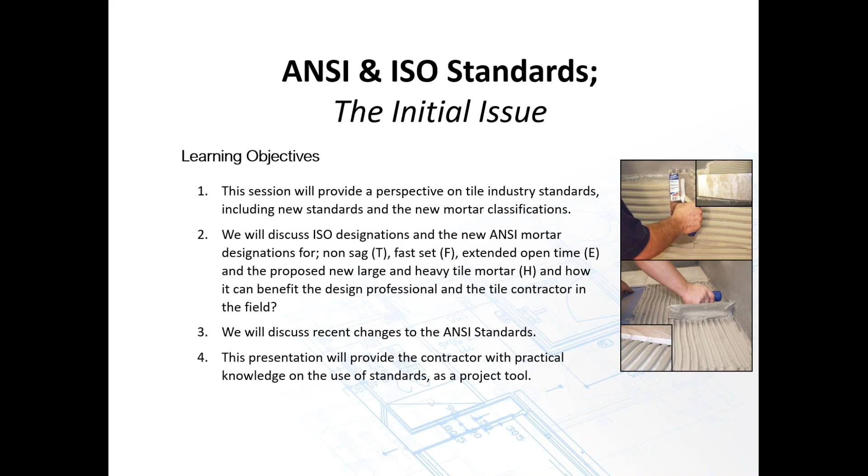First, let's talk about TCNA. The TCNA handbook, in the very front of the book, talks about using the TCNA handbook for specification writing. I know this is difficult to read—it's a lot of information on a single page, but hopefully the next page will help a bit more. Think of TCNA as kind of a guideline. The TCNA handbook is not a specification. It's really a reference that includes CAD details, et cetera, on installation methods.

What's highlighted in this first paragraph of the TCNA handbook, for use as a specification, is to use the American National Standards Institute, ANSI standards, for developing specifications. Specifications should conform to applicable building codes, ordinances, trade practices, standards, and climatic conditions.

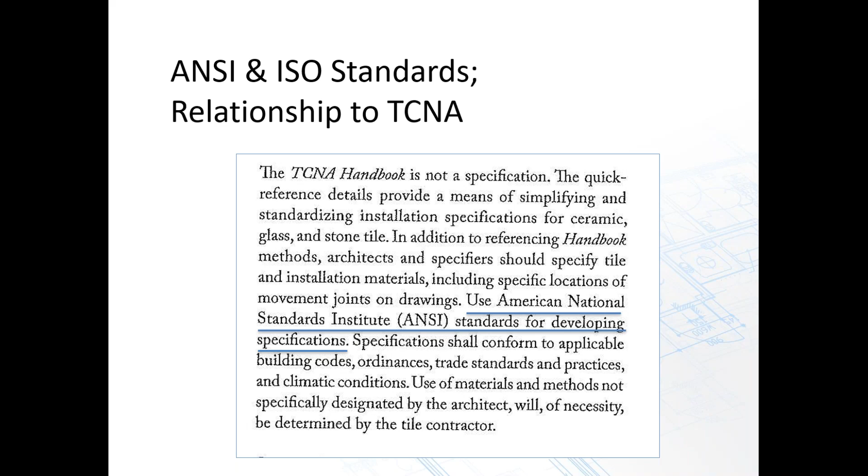So just wanted to get that out of the way. The TCNA handbook by itself is not alone—it really references ANSI. As we get into a method, this is a typical method in the TCNA handbook. I just wanted to point out, using their little pointer, that in here you'll notice the materials are all specified by ANSI standards, and where applicable, you'll also notice ISO standards.

Same thing is true of the grouts and the membranes. Uncoupling is still working on a standard, and for porcelain tile, there are different types of mortars that should be used. You'll also notice they've got installation guidelines for the tile, as well as glass tile, cementitious grouts, crack isolation membrane, uncoupling, and movement joints. So again, they're all kind of interconnected. Under notes, they talk about crack isolation membrane, ANSI 118.12, et cetera. So they are heavily connected together, and that's important.

So these are two different documents that work extremely well together in harmony to help a design professional and/or tile contractor put together the best specifications they can for a project.

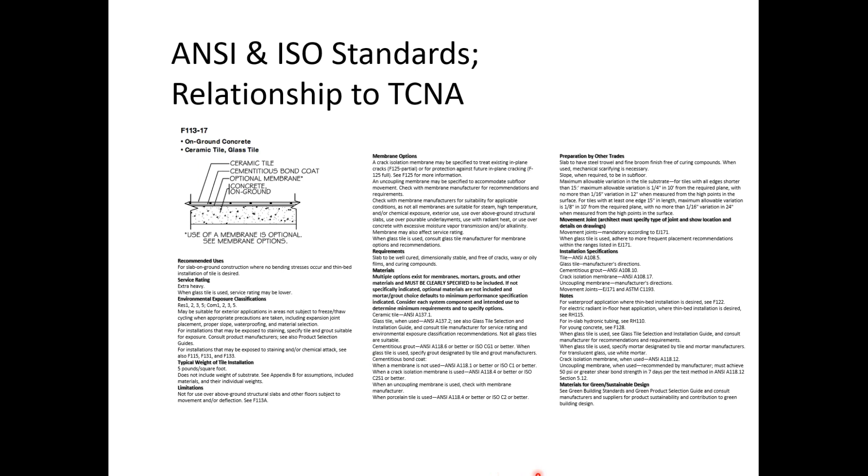Now, as I mentioned in the beginning, I am very actively involved in a lot of different committees, from TCNA to ANSI, you name it. These documents are put together by open consensus, or industry consensus. What does that mean? Well, that means we kind of throw a bunch of people in a room and we work it out—or fight it out, if you might—until we agree on something.

I can't think of a better example of this than the gauge porcelain tile standard—gauge porcelain tile, and gauge porcelain tile panels/slabs. The technical tile committee at ANSI was trying to decide on the name for gauge porcelain tile, or thin tile as we used to call it. In the room, many manufacturers liked the term gauge porcelain tile panels; others liked the term gauge porcelain tile slabs. So now you've got a gauge porcelain tile material standard, as well as gauge porcelain tile panels/slabs.

That is consensus. We came to an agreement on what it should be called. We worked very, very hard trying to get agreement throughout the committee. You're talking about 64 plus attendees or members trying to agree on documents and what they should say. It really takes a lot of work as a large group from different entities to come up with a good agreement. Some committees are better at that than others.

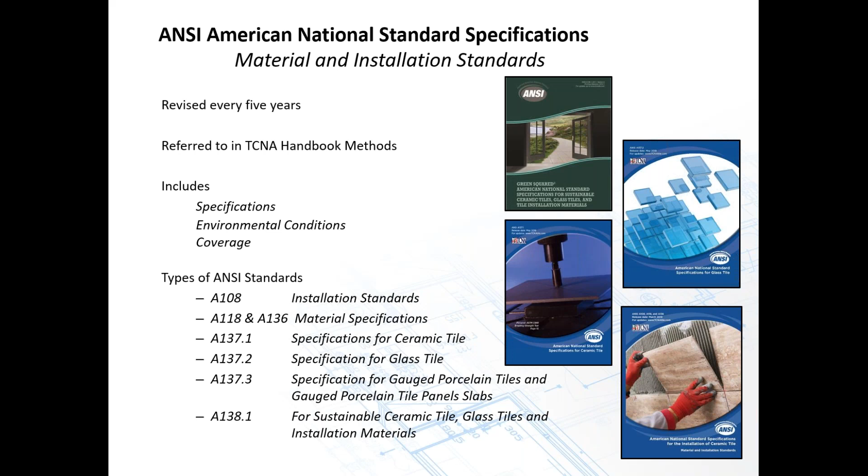Let's talk a little more about ANSI standards being heavily worked on at this time. One would be ready-to-use or pre-mixed grouts. A good example is our Flex Color CQ — you open the bucket, you use it, etc. It's kind of a new thing within the last 6 to 8 years, so we're working on a standard for that. I think that's progressed very well in the last couple of years.

The standard's actually being written. Round robin testing, I believe, is completed, so it's just a matter of analyzing all the results. Uncoupling membranes is one I mentioned earlier that's being worked on. There's a product standard for SLU, or self-leveling underlayments. Under review is the crack isolation standard.

One that's being considered is a standard for industrial epoxy grouts. These are used heavily in commercial kitchens and so on. They're a little different than the everyday epoxies you're used to 10 years ago — not your father's epoxies, if you might. These really hold up well to heavy chemical situations and food fats.

Tile deformation — a machine that'll actually measure the tile, and if it gets wet, if it expands at all, if it moves, if it is not stable.

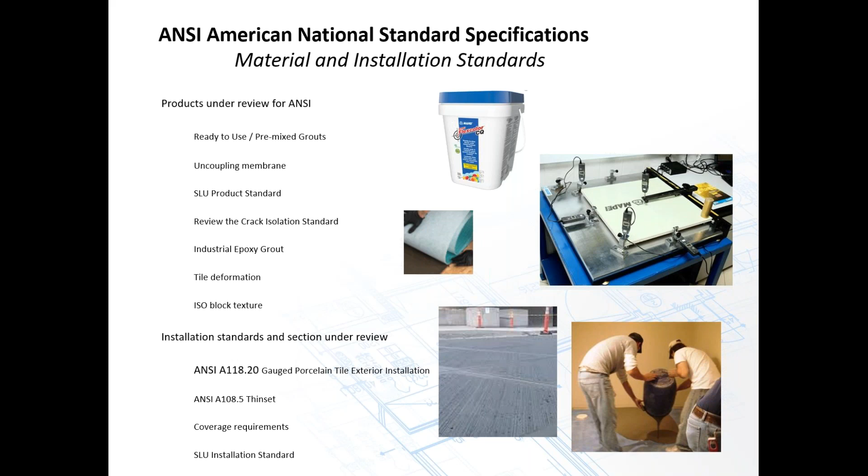Some recent changes to ANSI: the A108.19 gauge porcelain tile installation standard—again, that's for interiors only with a thin set mortar. ANSI A137.3, gauge porcelain tile as a product—in other words, the standard for manufacturing the product, the types of strengths it should have, where it could be used, etc.

The H designation was added to mortars for large and heavy tile mortars. I'll get into this in a little more detail. All the designations for ANSI mortars were added in 2012. In addition, in 2012 we came out with a new standard for mortars, the improved modified dry set cement mortar. We'll get into this in more detail as well, but it's a premium mortar, if you will.

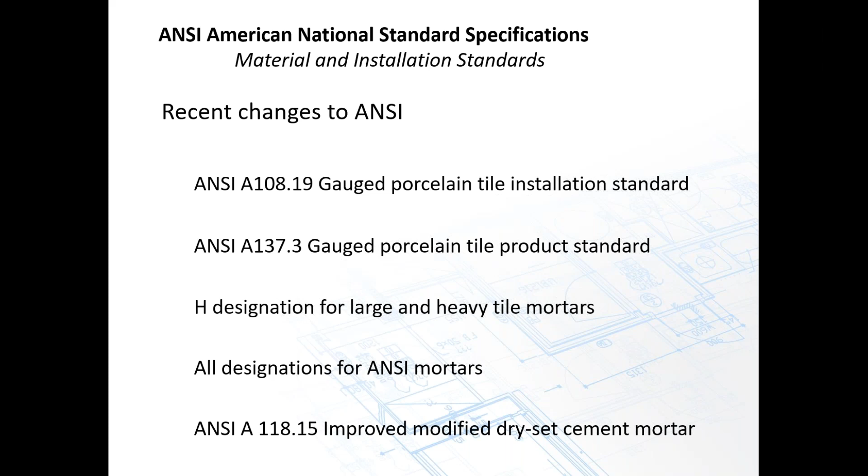All right, let's talk about gauge porcelain tile and gauge porcelain tile panels and slabs standards. ANSI A137.3 is the tile standard for gauge porcelain tile. ANSI A108.19 is the installation standard for interiors with a thin set mortar.

Why gauged? The technical tile committee felt like it made sense that this is a measured material, and the easiest way to refer to it would be gauge, much like we do with barbed wire or wire - 14 gauge wire, 10 gauge barbed wire, for example.

The emphasis is on the thickness, where thickness is crucial. Currently focused on thin, but could also be thick. I'm sure many of you have heard of a 3 cm or 30 millimeter porcelain tile today, or a 2 cm, 20 millimeter porcelain tile. These are 3/4 of an inch to 1 1/4 inches thick. The manufacturing process is very similar to what we do with gauge porcelain tile - it's just the powder, if you might, is made thicker.

These can be used anywhere from landscaping, just dropping them in your yard for a path or walkway, to maybe ballast roofs where they're having to have walk areas on top of a roof. Typically used in pedestal systems without any support - in other words, they put 4 pedestals underneath it and you're walking directly on the porcelain tile.

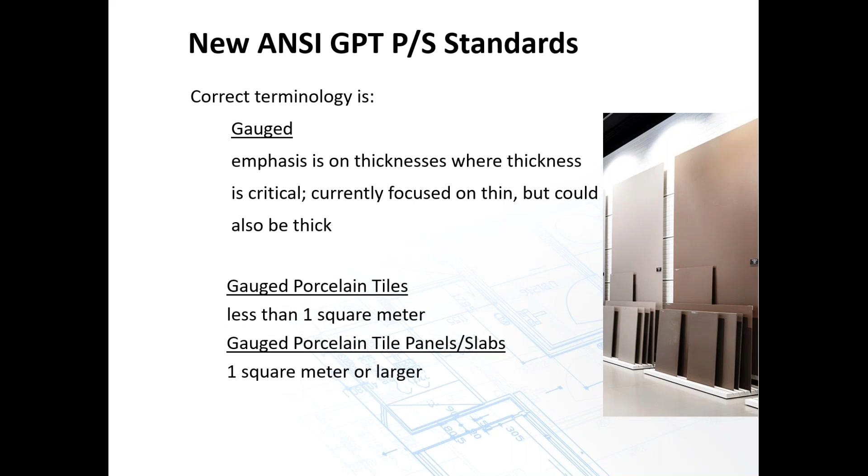A little bit more on the gauge porcelain tile panel and slabs standards. Table 4 has within it that it should have a nominal thickness of 5 millimeters to 6.5 millimeters for use on floors and walls, with or without reinforcing mesh. It's fairly common to see gauge porcelain tile with this mesh on the back of it. Some of the testing requires absorption and bond strength of this mesh after 7 days submerged, and as I said, they're also tested with and without the mesh for absorption.

Products with thicknesses from 3.5 millimeters to 4.9 millimeters are considered for walls. Certainly you could do thicker than that - 6.5 would be fine for a wall. They're not commonly marketed that way, but we certainly hear enough about and get enough requests for the thicker ones on walls too. Today we're getting requests for 12 millimeter, which is typically used for fabricating, but it's out there as well.

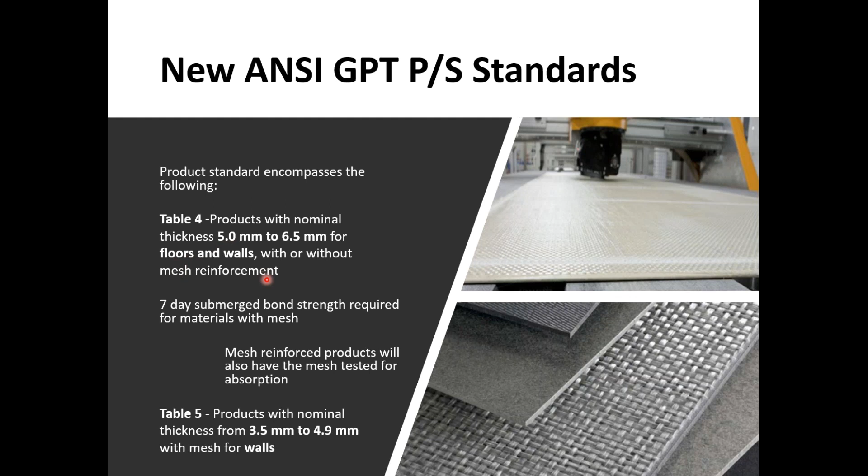The biggest thing I think we're really trying to stress here with this size is that these sizes are great for walls. You don't see them being recommended for floors and walls both. So really we want to stick to floors at 5 millimeter to 6.5. I hope that makes sense.

Really what happens with the gauge porcelain tile standard - I'm going to step away from gauge porcelain tile and just talk about traditional 3/8 of an inch or 10 millimeter porcelain. So if I took a concrete slab, about a 4-inch concrete slab, and on top of that thin set or use a polymer modified mortar to adhere 12 by 12 porcelain tile on top of it. Then I start these wheels that you see rotate four times with 900 cycles at 100 pounds per wheel, and it gets all the way up to 300 pounds per wheel, with a soft rubber wheel.

We look for damage. Anytime it's damaged, we stop the test.

It goes to the next phase, which is a harder rubber wheel. Again, 4 rotations of 900 cycles, with the weight on the wheels increasing from 100 to 300 pounds per wheel. If I was to go through the final rotations of this, it'll go all the way through 14 cycles, and the last section is with steel wheels. So we're really abusing the system, constantly rotating, and so on. You can imagine it takes a lot of abuse.

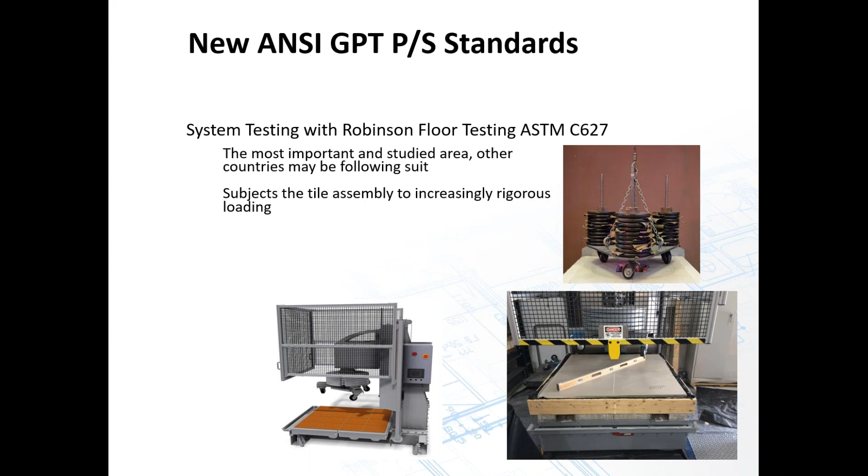So we really test assemblies. In the case of gauge porcelain tile, it has to come out with a light commercial testing, with gauge porcelain tile used instead of the regular porcelain tile on top.

So the TCNA handbook, you'll see a lot more on service ratings, but to give you an idea: cycles 1 through 3 gives you a residential rating, again with up to 300 pounds per wheel. 4 through 6 you get light commercial, then moderate commercial, heavy commercial, and extra heavy. You can kind of get an idea - commercial kitchens and so on for extra heavy, food plants, dairies, breweries.

Really, they're taking fork truck traffic as well as pallet jacks, heavy carts, a lot of concentration on a small wheel. Just because an assembly may pass extra heavy does not mean the manufacturer wants it used in heavy. I'll come back and talk about that in a little more detail.

But heavy is for malls, stores, commercial kitchens, etc. Light institutional work, restaurants as an example, or hospitals for moderate. And then light commercial would be offices and bathrooms in an office complex. And last, foyers as an example of residential.

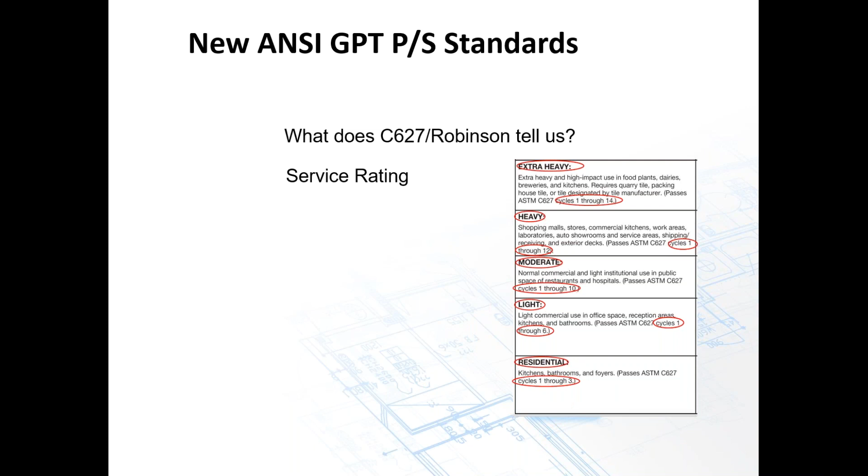So typically with a gauge porcelain tile, this is the type of damage we see. It doesn't just crack as we typically see with 10 millimeter or 3/8 inch porcelain tile - it actually spalls, or fractures right there, and the grout joint will typically pop out as well. Light commercial is the minimum requirement for a gauge porcelain tile to say it meets 137.3.

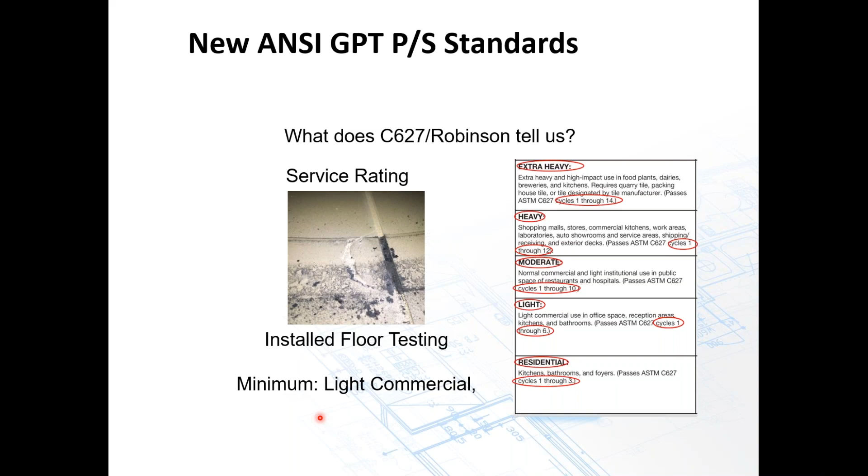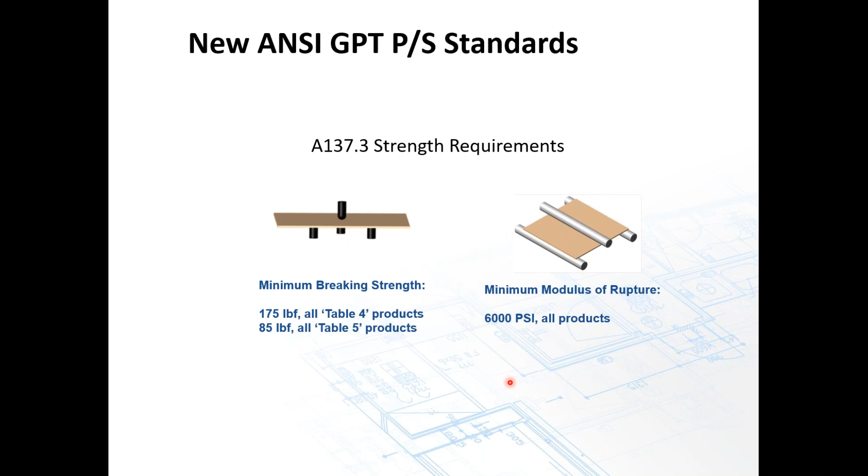Some other tests that are done: minimum breaking strength - how many pounds of pressure does it take per foot to actually break the tile? You can see it's suspended on 3 legs, and pressure is applied to the center. Same thing here with modulus of rupture. All right, that's just a quick overview on gauge porcelain tile.

Let me talk quickly about the installation standard - this is the installation standard for interiors with thin set mortar. There are 20 sections to the new installation standard, and I'll show you some that you've never seen before in ANSI standards. Job site and material handling requirements - we didn't used to have that when it came to 8x8 or 12x12 tile. But today with tiles 5'3" by 10'6", you need a large enough area to work and to transport it through, and to protect it.

We have things like how do you embed the tile in order to get coverage, workmanship, what happens with damage to the tile work, contractor qualifications - all important.

As I said, the ANSI test methods are reaffirmed or revised every 5 years. In 2012, there were some real changes.

They revised the 118.1 and 118.4 standards, and then brought out the new 118.15 standard. These new mortar standards and revisions brought out a new test method and new mortar standards.

118.15 is a premium latex modified mortar. I'll get into why we say that in a little more detail. This new mortar designation is new to ANSI and very, very important. It can be very beneficial to you in the field, so let me talk about that.

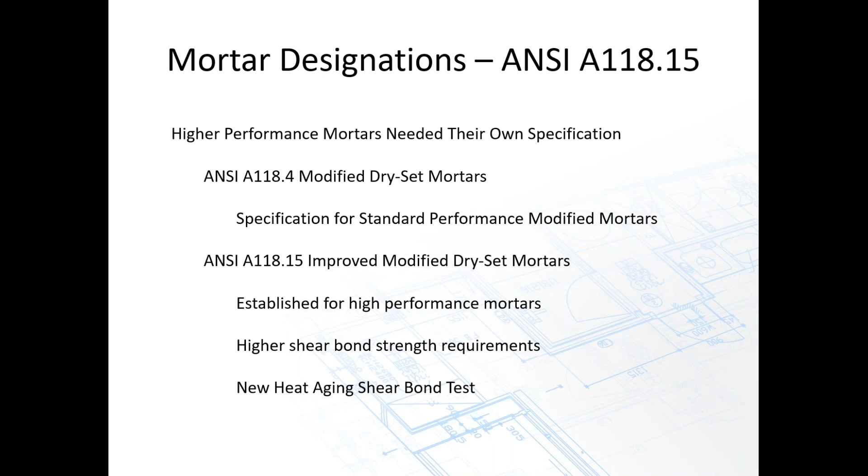So the heat age shear bond test takes 2x2 porcelain tiles bonded together, offset 1/8 of an inch. The specimen is cured 14 days at basically room temperature, between 70 and 77 degrees Fahrenheit, followed by 14 days at 158 degrees Fahrenheit.

The interesting thing about this type of mortar, because of the temperature fluctuation, you aren't going to just pass this by adding more cement to it. You have to actually make sure that you're really controlling the polymers and the additives to make sure that it can perform well through these thermal changes. So with a high cement ratio alone, that's not enough to pass it - it really requires a high polymer content to pass this test.

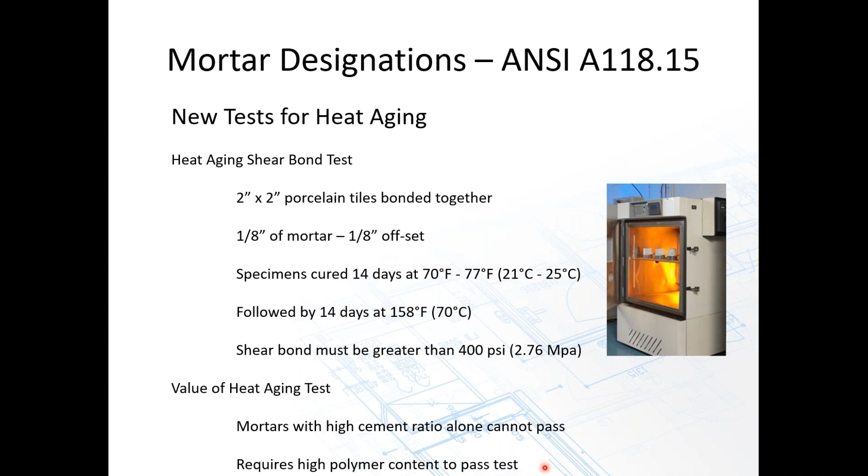Where might you use a 118.15 mortar? Anywhere where freeze-thaw might be a consideration, where flexibility is desired - maybe a lobby on the 50th floor of an office building in front of the elevators - where improved bond strength is necessary. So you've got something you believe is difficult to bond to, could be a porcelain tile.

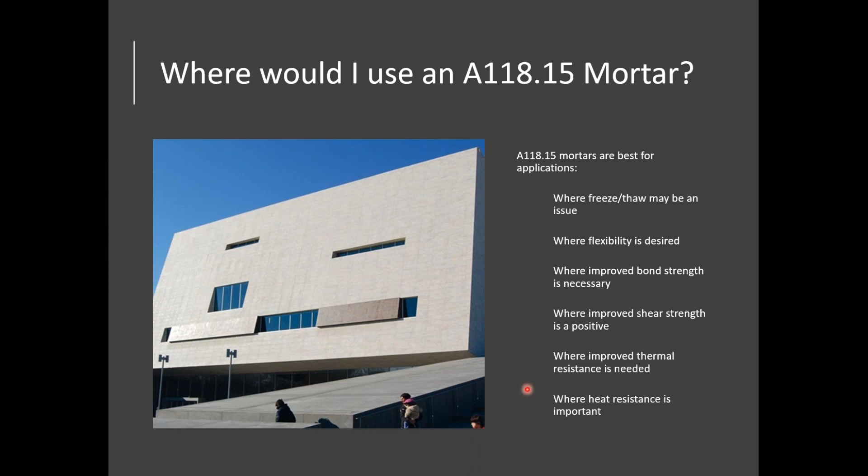In the case of, oh gosh, I'm trying to think of a great example - well, for that matter, it could be a membrane or something like that that's tough to bond to. Where improved shear strength is important, where improved thermal resistance is needed, where heat resistance is important.

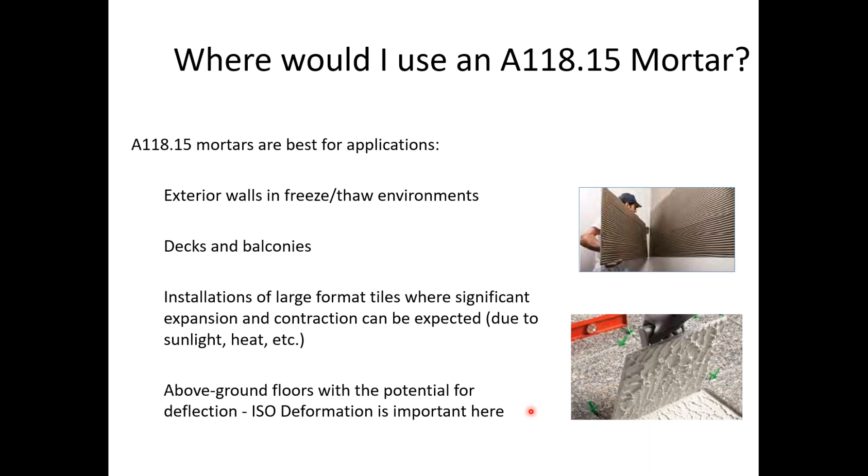Great example: exterior walls where there's a freeze-thaw environment, decks and balconies, the installation of large format tiles where significant expansion and contraction can be expected, maybe a lot of thermal change, above grade or above ground floors with potential for deflection. ISO designation for deformation could also be very, very important here - I'll get into that in a little more detail.

So these are some of the test methods for everything from 118.1 to 118.4 to 118.15 mortars. And you'll notice that when you look at some of the strengths here - and I won't go through all of them by any means - but to give you an example, shear bond test tile to tile.

Here you're looking at 200 PSI for a non-modified dry set mortar, 300 PSI - so 50% higher - when it comes to 118.4, and 450 PSI when it comes to 118.15. That's an exceptional jump - again, 50% higher.

When it comes to heat aging, it's not done at 118.1, it's not done at 118.4, but I was correct: 450 PSI after 14 days at room temperature, then 14 days at 158 degrees. That's impressive, if you ask me.

You'll see a lot of differences as you go through it, from 150 to 200 to 400 PSI, doubling in strength after 28 days. Also 28-day heat aging here with a porcelain tile has to be 400 PSI. 28-day freeze-thaw cycling, 118.4, 100 PSI, same requirement for the 118.15 mortar. So you can see a real benefit in the 118.4, 118.15 mortar, I believe—much higher strengths, good flexibility, allows for thermal expansion and contraction much better.

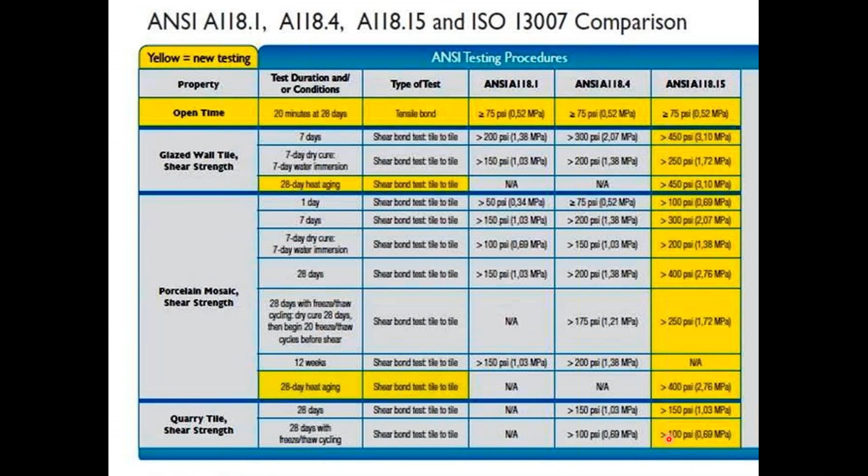All right, so when they added the 118.15 designation for improved modified dry set mortar, they also added mortar designations. So if you had a 118.4, I'm going to keep it real simple. Again, these designations could be added to any of the mortars, but when you have extended open time, 118.4, it might say 118.4E, extended open time.

What would be the benefit in you knowing that? Maybe you're working with large porcelain tile and you want to make sure you have plenty of open time, because you're going to be spreading 50 square feet on the back of a tile as well as 50 square feet of mortar on the back of the substrate. So you really have to have a lot of open time—an extended open time mortar would be wise to have.

118.4F would be a fast setting mortar. 118.4T, non-sag mortar, and the newest one from last year, 118.4H, large and heavy tile mortar, medium bed mortar. So that's new.

When it comes to 118.11, you have to meet 118.4 and all of it. For it to become 118.11, it also has to pass the exterior grade plywood test. So 118.11 has very little content to the testing because most of it's in 118.4. It's an extension, if you might, of 118.4, but with the plywood test—so it is still part of it.

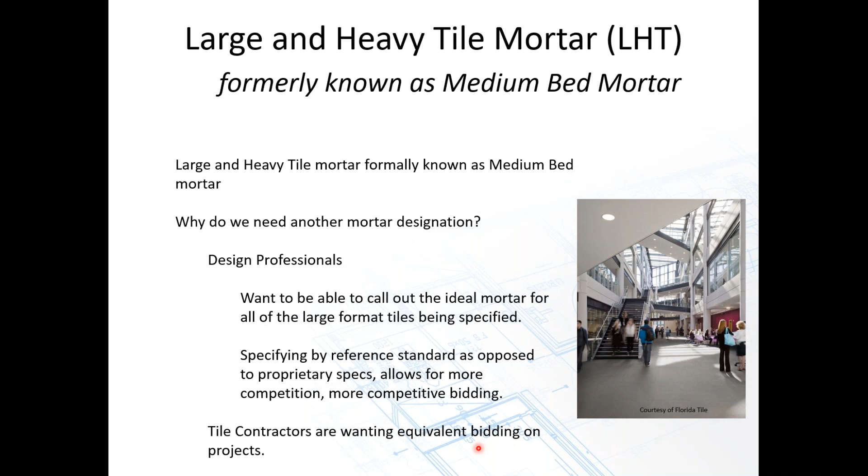A little bit of benefit of the LHT type mortar: it's defined by its performance characteristics. They're looking for non-sag or non-slump characteristics. If I put a heavy stone or tile into the setting material, I do not need it sinking in and oozing up through the grout joint. I need it to sit there and for me to beat it in or work it in, moving it back and forth and get it bedded properly to even out to the tiles next to it.

We're looking for less shrinkage at thicker depths. So this material, after it's been notched, tile installed, it's been flattened down or beat in, it can go as thin as 3/32 or as thick as a 1/2 inch. Standard mortars, ones that are not large and heavy tile mortars, typically are 3/32 to 1/4 inch, to give you a comparative. So you can go twice as deep with this.

This provides better coverage for large tiles with some warpage, right? Today we're dealing with plank tiles, up to 6 feet long, and in the center you might have some warpage—or fairly common to see 2 foot by 4 foot tile today. A little bit of warpage in a 4 foot length is quite a bit, it can be sticking up. So if we don't get the proper amount of mortar underneath it, that tile is going to have a void right there at the highest point. We want to make sure it's properly covered with mortar underneath it.

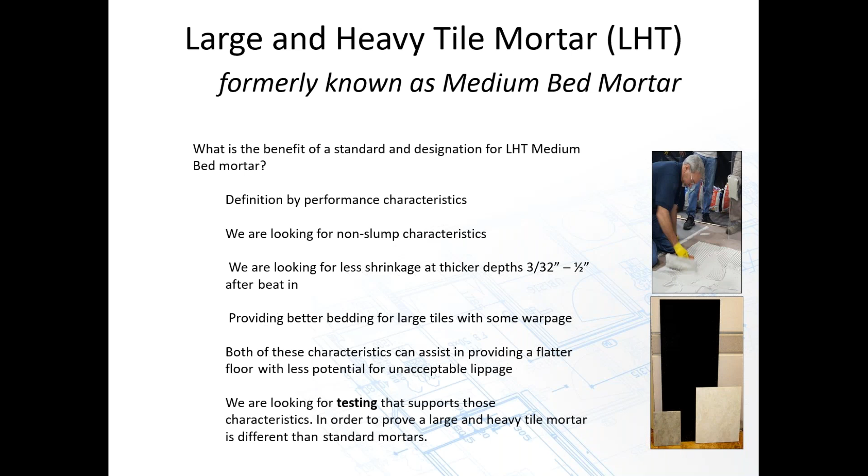So when it comes to the test standard for this material, it actually takes a tile or stone that weighs a certain amount—I believe it's greater than 5 pounds per square foot. It is set even and flat, it has to have virtually no lippage, and then after 28 days it's measured again to make sure that the lippage doesn't exceed the lippage requirements within the ANSI standard.

What was wrong with medium bed? That's what we called it forever. Where'd LHT, or large and heavy tile mortar, come from? Well, what started happening is contractors started getting asked to do, instead of properly preparing the substrate, general contractors would tell the tile contractor just go out there and do a medium bed method. Just build up the mortar, make it work. Not a good idea. There's a lot of potential for shrinkage and other issues with this.

They were actually starting to see from architects standards that said medium bed method. So for a traditional mud bed, we're going to have 1.25 inch minimum up to 2 inches recessed concrete slab, then tile setting material, mortar bed. We're going to be roughly 1.5 inches with the tile and setting material to meet that recessed slab. We were finding recessed slabs out there that were 1/2 inch, 3/4 inch. Basically they weren't done correctly, and we're being asked to do that with just a thick bedding of mortar. That's not its intention.

The medium bed mortar method was used commonly to prep for bad substrates. And there really was a lot of abuse of the term medium bed, so the industry just felt it was best to get it out of our vocabulary.

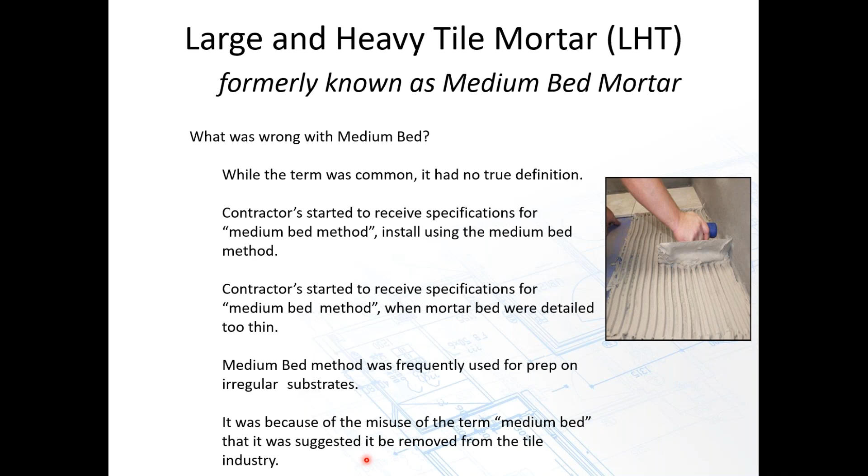According to the TCNA handbook in 2020, it still says LHT, or formerly medium bed mortar, is a thin set bonding mortar for ceramic and stone tile formulated by the manufacturer to minimize slump and facilitate a thicker bond coat as compared to typical dry set mortars, basically.

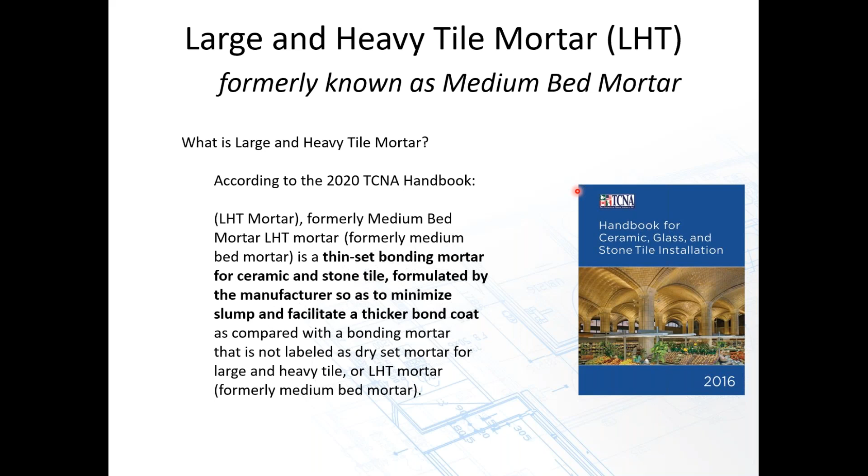Again, in the TCNA handbook in 2020, it says LHT, formerly medium bed mortar, is declared as such by its manufacturer based on its characteristics. There are no ANSI or ISO standards specific to this type of mortar. That is no longer correct.

Today we have the LHT mortar, which has the H designation at the end of the 118.1, 118.4, possibly 118.11 or 118.15 mortar. And that is to recognize it as being a large and heavy tile mortar, or formerly medium bed mortar.

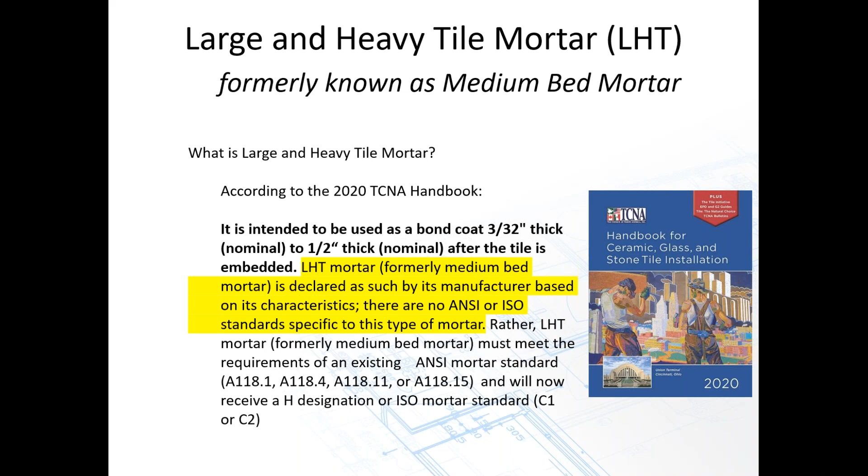It goes on to talk about the benefit of the LHT mortar being able to support a heavier tile, being able to deal with large format tiles in order to get enough bonding material in there to get mortar coverage in case of warpage or anything like that. And the same thing here, talking about warpage or regularity of the tile.

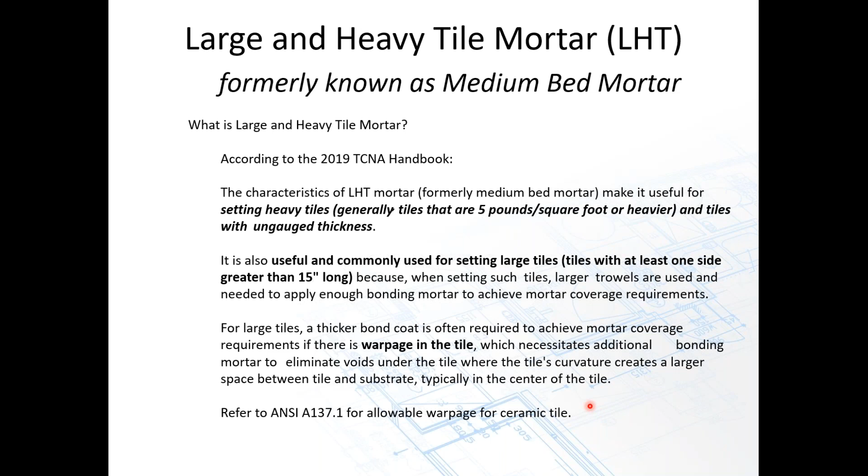And for 118.1, 137.1, if you want to get into the specifics about warpage, there are different grades within the case of porcelain tile, from calibrated to rectified and so on, rectified being the tighter of the two standards. Look at the 137.1 standard.

To the specifier, the TCNA handbook says the LHT mortar is not intended for truing or leveling the substrates or to correct the work of others. Substrate variation exceeds allowances. LHT mortar cannot be used to remedy such because the application would exceed the limitations of the mortar. LHT is intended to be used to install tile per 108.5 and the installation standard for ceramic tile by a thin bed method.

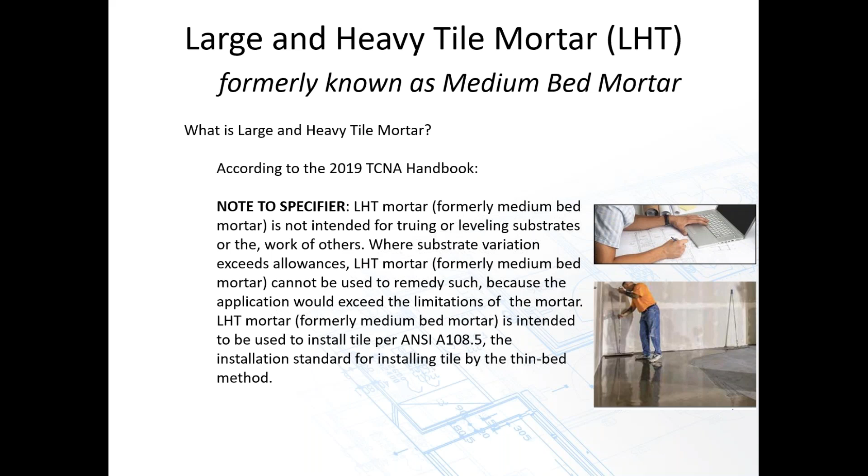Really what we're trying to get at there is if the substrate needs repair, repair it, and you should be paid for it. The installer should be properly prepared to prepare the substrate just as the rest of the other flooring industries are. The wood flooring industry, the resilient flooring industry, they don't even think twice about prepping a floor. They just go in there and do it before they do their project.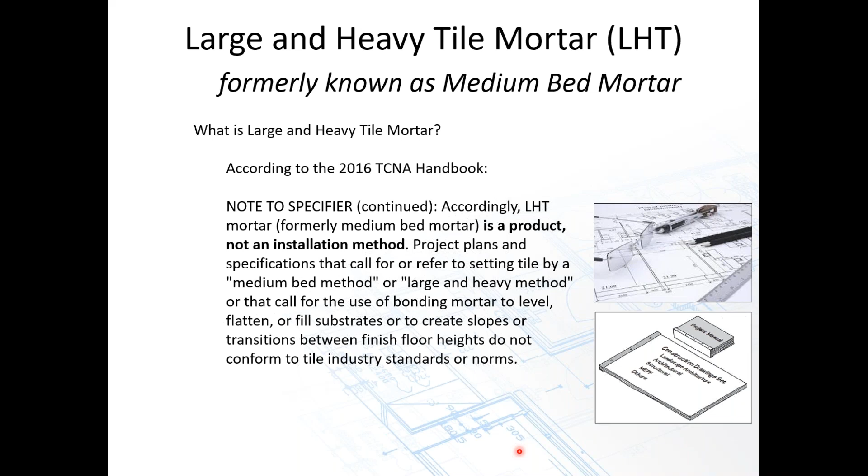To the specifier, again, this continues: accordingly, LHT is a product, not an installation method. Project plans or specifications that call for setting by a medium bed mortar method or large and heavy method that call for the use of a bonding mortar to level, flatten, or fill substrates, or create slopes or transitions between finished floors, do not conform to the industry standards.

So again, where might you use a large and heavy tile mortar? LHT or medium bed mortars have been around for many, many years and are very popular. They support thick and heavy units. A great example could be this large thick tile, or in many cases, a slate. If you got an ungauged slate, which used to be very popular years ago, it wouldn't be uncommon to pick up an 18 by 18 inch ungauged slate, and at one end it's 3/8 of an inch in thickness, and the other end 3/4 of an inch in thickness.

The large and heavy tile mortar would help accommodate for those irregularities or take care of that thickness difference. So it accommodates for thickness variations in the box screed method.

The box screed method is really probably the best way to explain that when you've got different thicknesses of tile. That's another nightmare for installers today - different tiles from different manufacturers with different thicknesses being designed together in a pattern on a floor. That's a real nightmare. If you have one that's 3/8 of an inch and one that's closer to 1/2 inch, that's very difficult. The best way to handle it would be through a box screed method.

For that matter, you put a mortar board on a mortar stand, cut a hole in the middle, and around the outside of that stand you cut 2x2 lumber. Let's say the thickest tile is a 1/2 inch in thickness. I lay the face of that tile down and want 1/8 of an inch of mortar on top, so I cut my 2x2 lumber at 5/8 of an inch in thickness. Every tile I lay in the face of that mortar board, I screed off the mortar and it always comes out 5/8 of an inch thick, whether I pick up a 1/2 inch thick tile or a 3/8 inch thick one. Then I set it to the floor, to the notches on the floor. So that's the box screed method, and another great example of using LHT mortar.

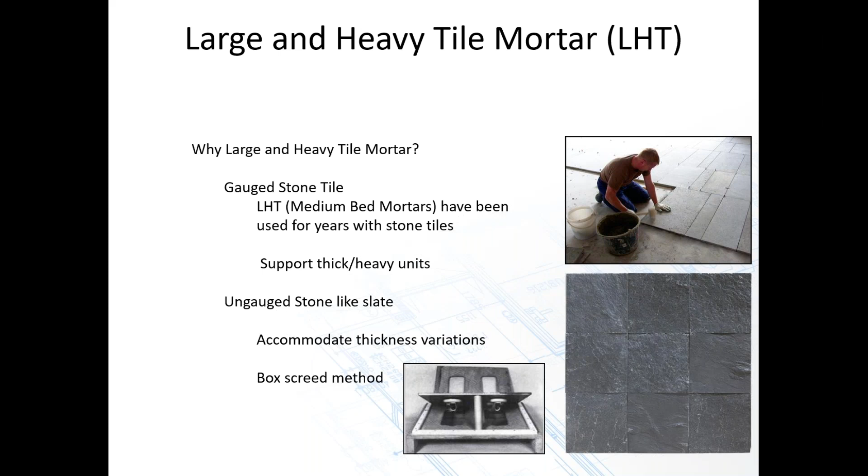Why large and heavy tile mortar? For warped tiles, to reduce potential lippage. Large format tiles where one edge is greater than 15 inches. Heavy tiles weighing 5 pounds or greater. The ability to adjust imperfections in tile or stone because of a thicker bedding. And specialty uses like saltillo tile or talavera tile, which we saw for years with very irregular backings, to make sure they get good coverage.

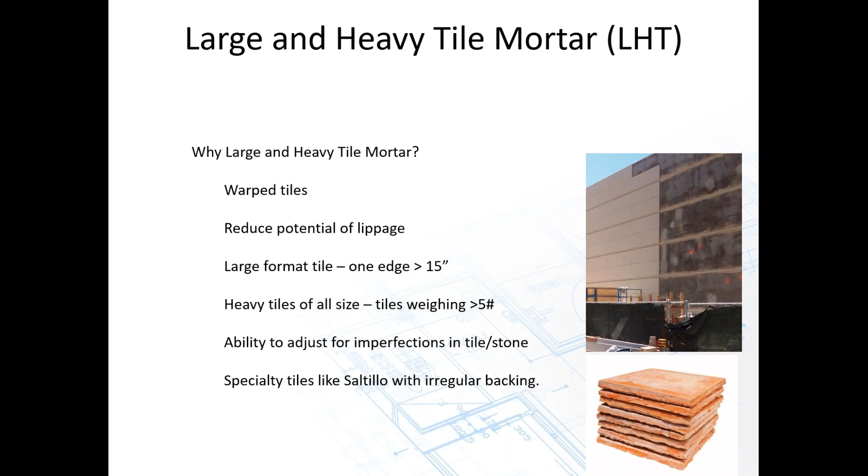Another characteristic about LHT mortars and the T rating is typically Thixotropic. What does Thixotropic mean? These mortars, while applied thick, hold the notch fantastically. When you go to move the tile or agitate it back and forth, you create shear and that material starts to flow a little, increasing your coverage. What does Thixotropic really mean if you don't understand what I just said? Well, you pick up a ketchup bottle, turn it upside down, nothing comes out. But if you shake it or hit the bottom, you create shear and ketchup flows out.

So the same thing is true here. We notch this out, it holds the ridges very well at a thicker depth. Lay a tile into it, push it back and forth to create shear, and that material increases its coverage just by the Thixotropic characteristics of the mortar. Hope that makes sense.

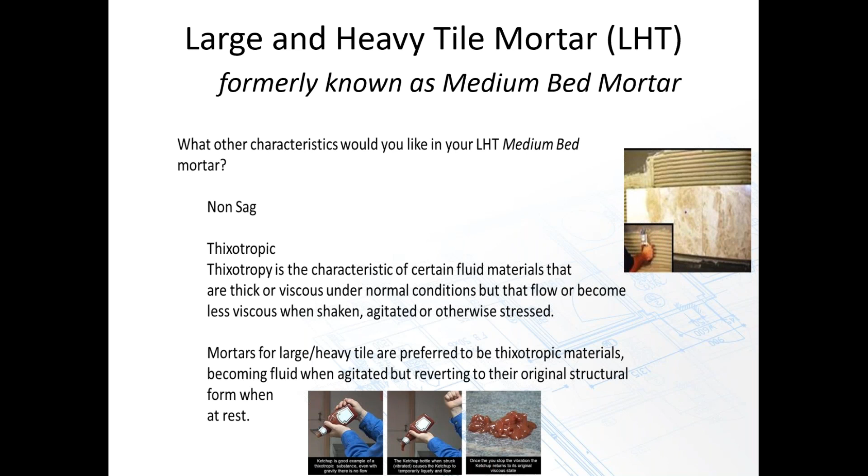Some problems with not using the proper LHT type mortar - again, it really should be used with tiles with one edge greater than 15 inches. All substrate preparation with those types of tiles should be within 1/8 of an inch and 10 feet, done previous to installing the tile, no more than 1/16 of an inch and 2 feet from the required plane. Truing with just thin-set can lead to shrinkage issues and loss of bond.

Needless to say, I told this gentleman he needed to get some tools out of his truck. We went down to the 20th floor to his truck, and I said, look, this is an issue with your application, and you need to get back up there and tell the owners about the issues and why this shrinkage occurred. I'll give you all the materials you need to work this out. This came out to be very amiable, and trust me, I did not want to upset Matt, a former linebacker for the Atlanta Falcons.

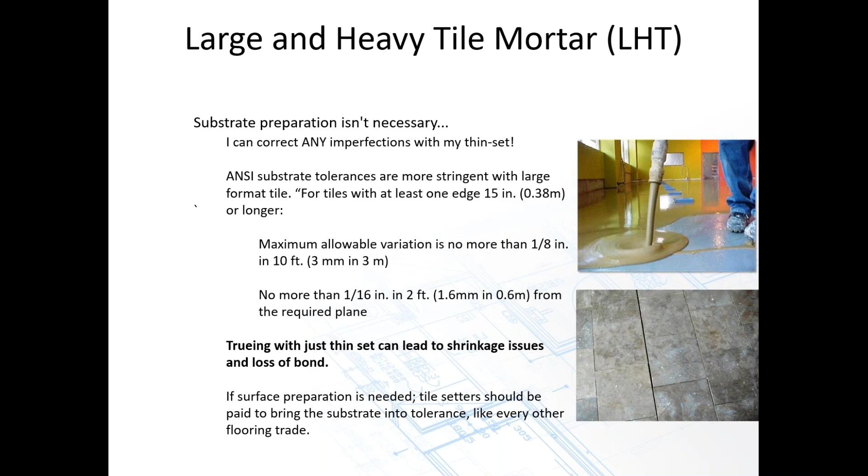Still a friend today. Let's talk about ANSI and ISO, because they're both related.

ISO is the international standard throughout the world and commonly used globally - ISO 13007 for ceramic tile as well as installation materials. It's an independent, non-government international standards organization with membership of 162 national standard bodies, like ANSI. It has delegates from 50 different countries, meets a couple times a year, and again is done through voluntary consensus basis. Why does it matter? Because ISO created the recognized way of identifying mortars and the mortar designation that we talk about today in ANSI.

Give you an example of how they do it, very simple. They've got 3 different types of mortars by chemical nature. One is cement or cementitious. D is dispersion, like a mastic. R is resin reaction, epoxies and urethanes. And then it's either rated with a 1 or a 2. 1 normal, 2 improved. C2 is an improved cementitious mortar. Very simple.

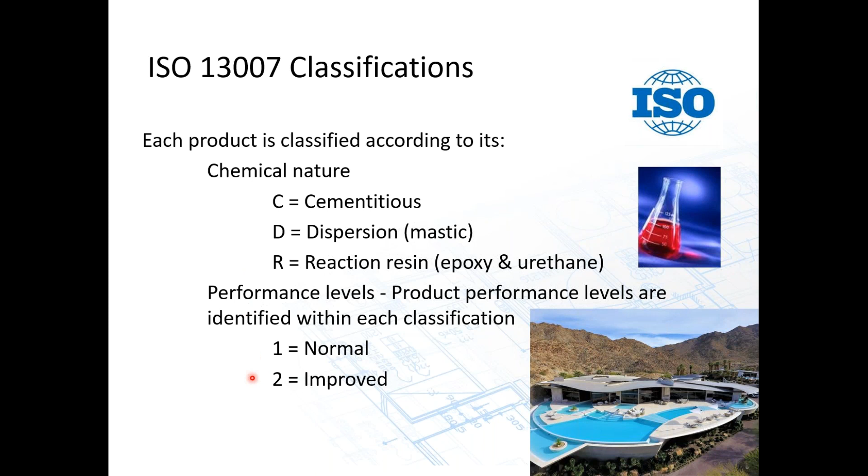This gives you a better example of looking at it in the mortars. And in addition to that, they have the designations we talked about in ANSI, except there's some new ones here. I want to point out that there is one for deformation. We do not have that in ANSI at this time. So flexibility: S1 being it's deformable, S2 being highly deformable or highly flexible. P1 is for plywood adhesion, P2 improved plywood adhesion. Very, very important. So ANSI has these in mortars, but they do not have these 4.

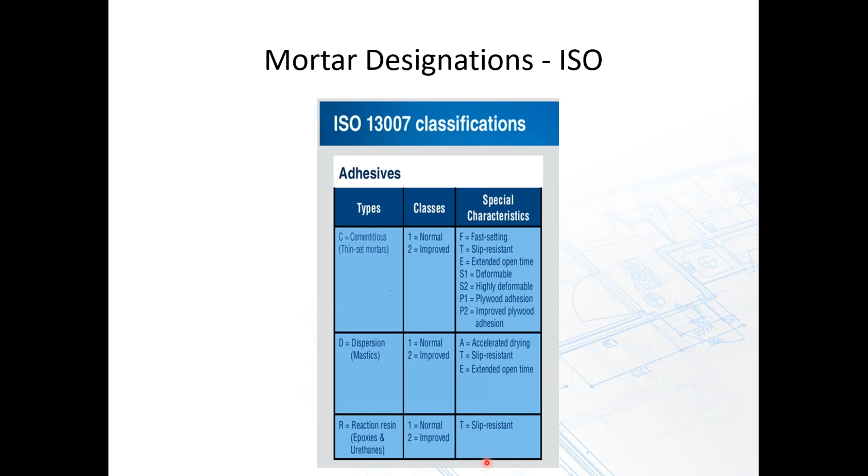In dispersion mastics, we've got D1, D2 for normal versus improved, accelerated drying, slip resistance, and extended open time are characteristics they like in that mortar. For reaction resin, again, R1, R2, and slip resistance. R2T would be a common one for non-sag improved reaction resin urethane, like our Planacrete W.

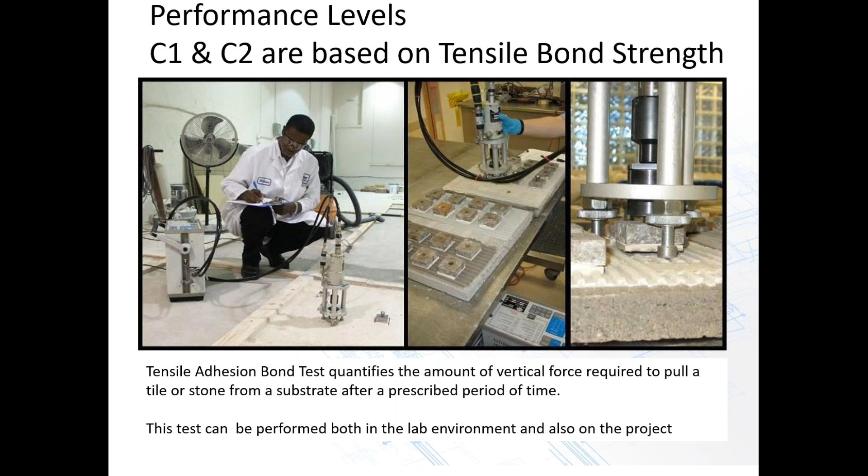So as I said, you got tile to tile, face to face, offset 1/8 of an inch, and then pressure is applied to both edges, and it's actually sheared off. Entirely different type of test. However, in the tile industry, in ANSI, it's not uncommon to see tensile as well.

It's commonly done with improved or open time tests, and that's what these are. In the case of extended open time, we adhere tile down at different timing increments, and then come back later and break them free. At one point, the mortar starts to skim over and doesn't have the best bond. As you can see here, it's barely bonded, and then hardly bonded here at 30 minutes.

So with extended open time, you're looking at after 30 minutes. Typical open times, not extended, are within 20 to 30. So that's what gives you the E designation, better open time. One place I'd really want to consider extended open time would be difficult installations where you're trying to manipulate a lot of things. Could be a pool, could be curves in a pool, could be curves in a seat like this. You're just trying to make sure that all the intricate pieces are put together right. Gauge porcelain tile where you're spreading out a lot of mortar in 2 areas.

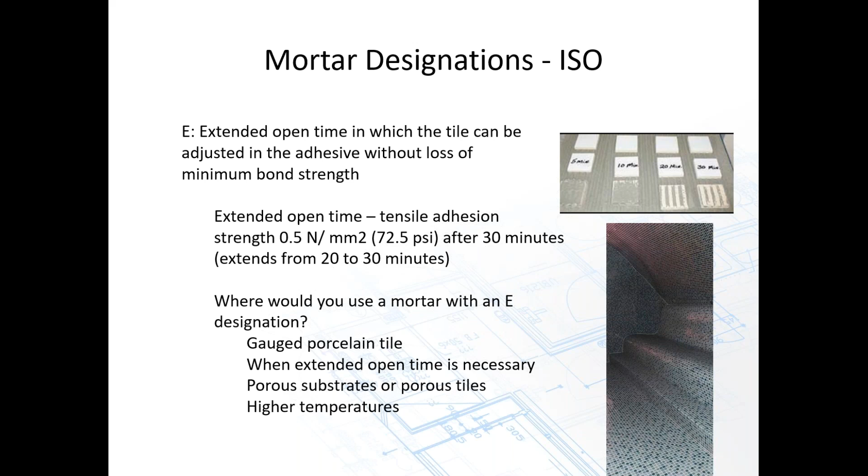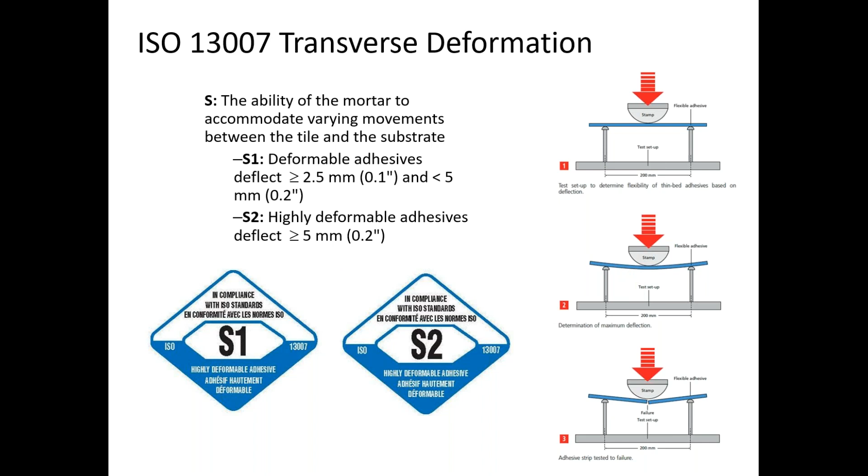This is an example of one of those polymer sheets that are put in that press. There's dry latex polymers and there's liquid latex polymers. Typically the liquid does a lot better job of allowing for the flexibility, allowing for more deformation. And you'll see that in the ISO standards.

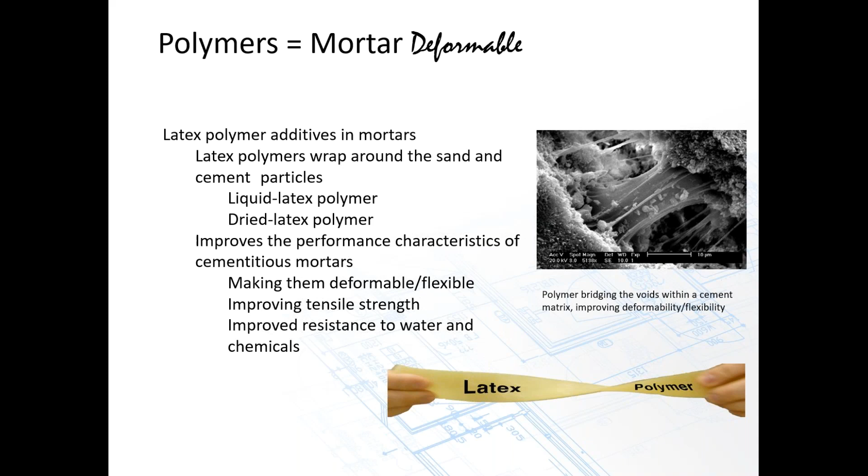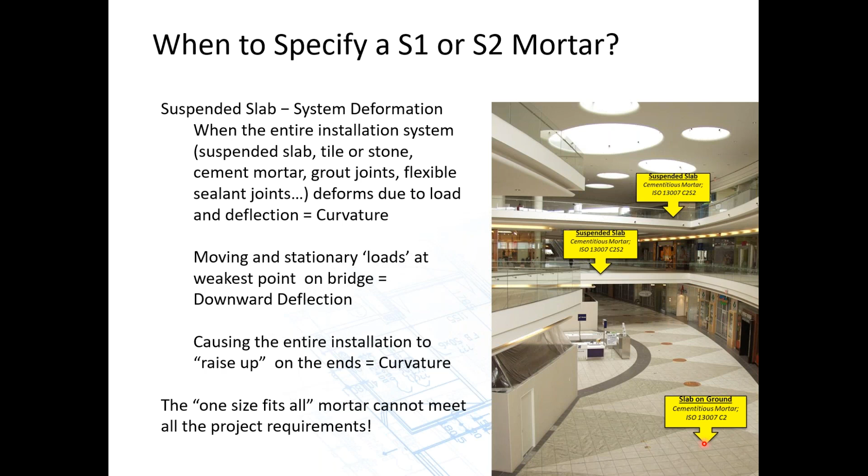Where would you want one that allows for deformation? Well, maybe in a mall where you've got the second floors to flex quite a bit with traffic. Same thing true of the third area. Slab on grade? No, not so much. It's not quite as critical, right? So areas where you're anticipating a lot of movement.

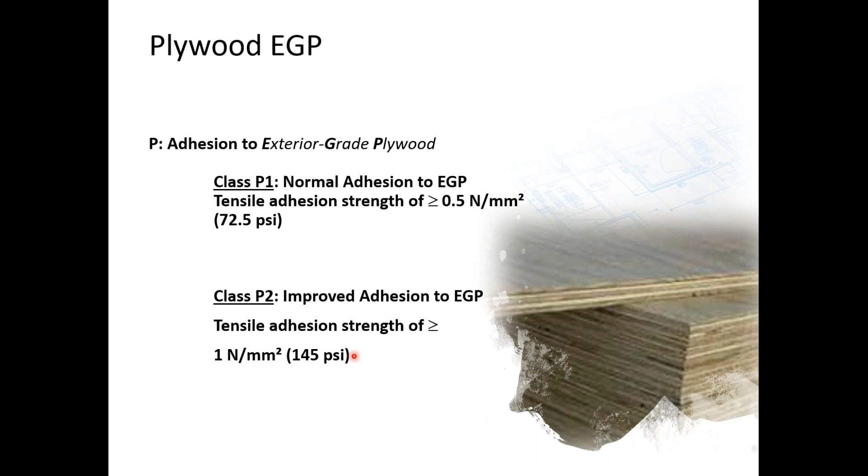P1 is normal plywood strength, and P2 for exterior grade plywood with higher strengths, going up to 145 PSI tensile strength to the plywood, as opposed to half that for P1.

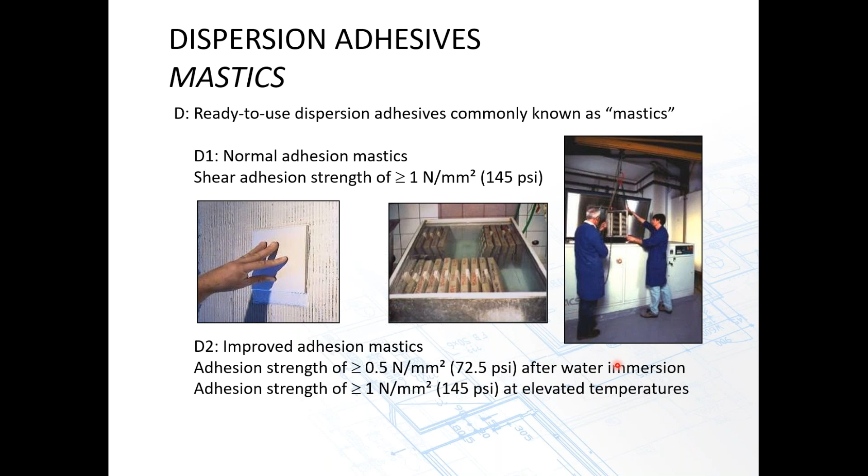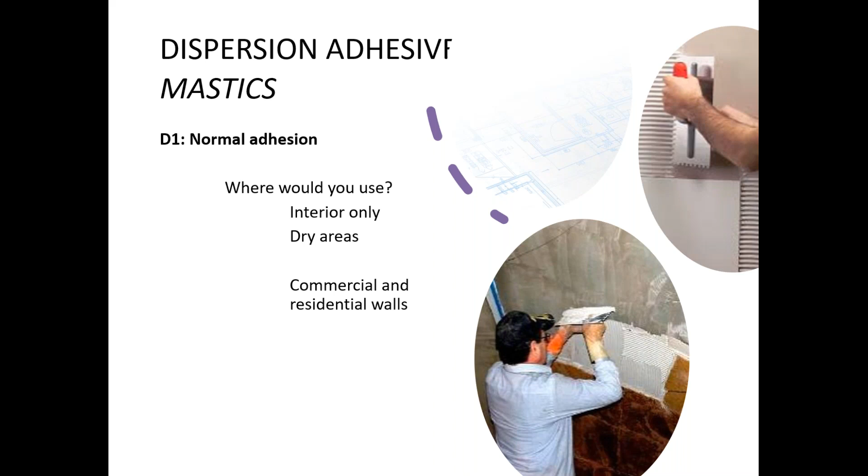D1, normal installations, anywhere, a dry area, interior areas, powder rooms in a bathroom would be a great example. Commercial and residential walls. D2, I'd use it in a wet area. To me, that makes complete sense. So intermittent wet areas, bathroom showers, etc.

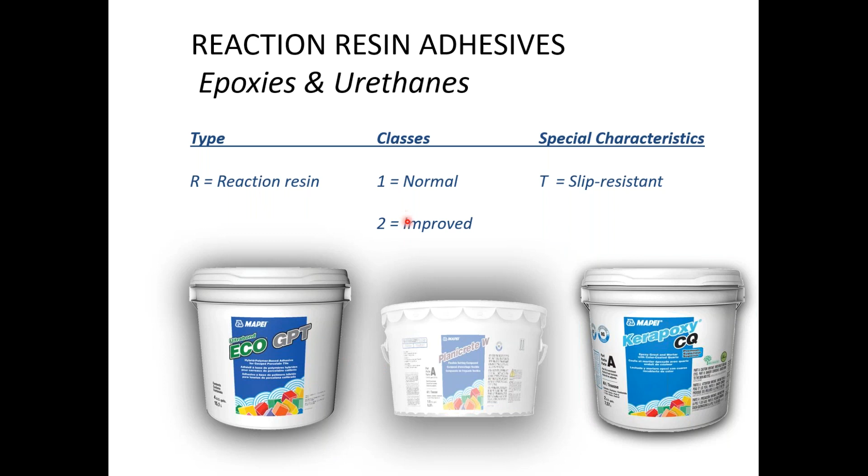Reaction resin, like our urethanes, it's the best example I can think of in the industry, not to mention epoxies. They're reaction resin, 1 normal, 2 improved, and T for slip resistance. So these epoxies and urethanes are used over steel, moisture sensitive stones, chemically resistant applications like a dairy or brewery,

really difficult to bond substrates like steel. We do a lot on ships with epoxy type adhesives and urethanes for that matter. One is a little bit more brittle, one is a little bit more flexible. The urethane can be more flexible.

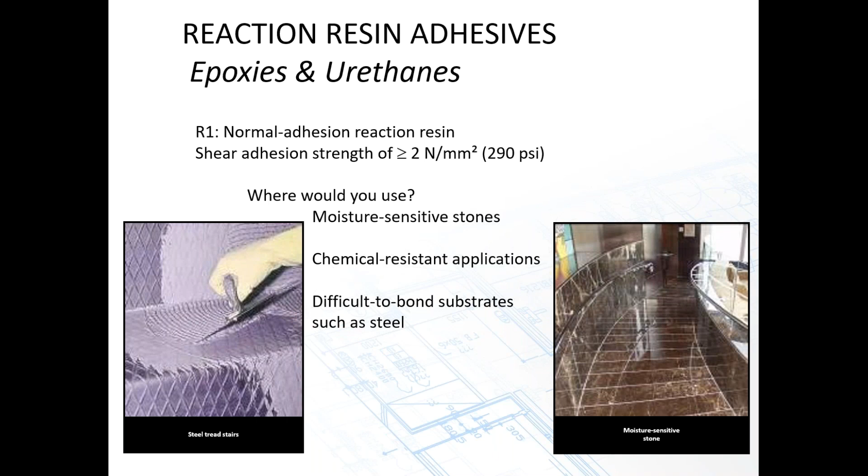Again, R2, where might you use that? Moisture sensitive stones, chemical resistant applications, difficult to bond steel, industrial plants, and where you got a lot of thermal shock, a lot of high expansion, contraction, and so on.

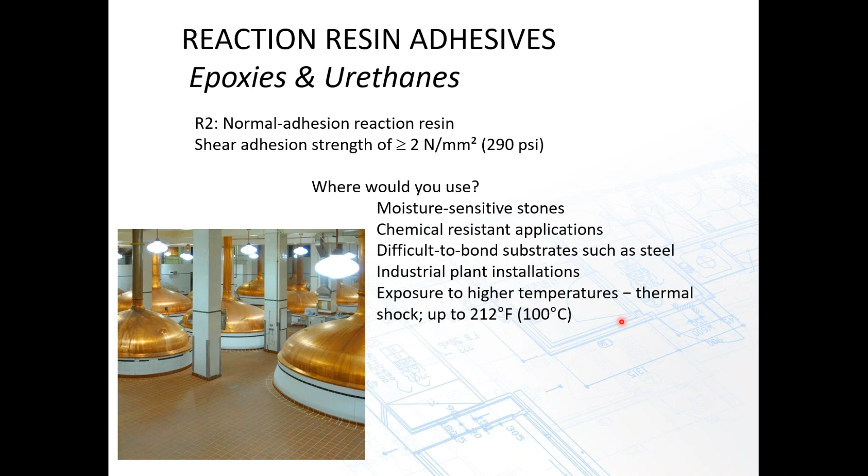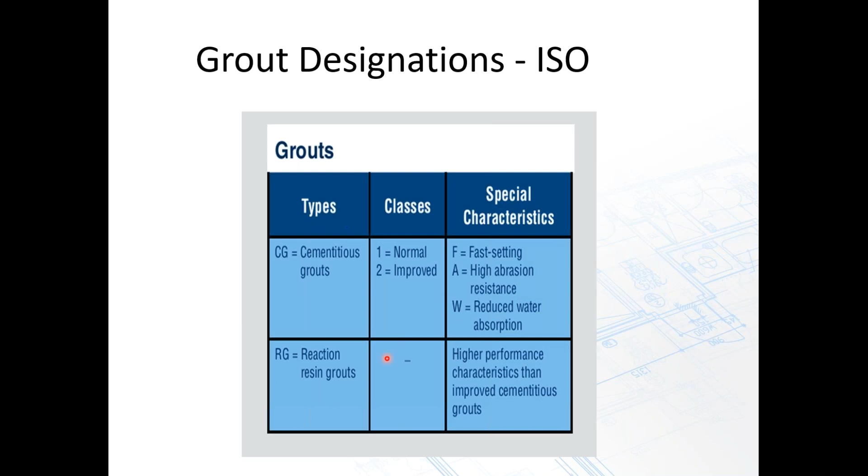Grouts, we have the same thing. CG for cement grouts and RG for reaction resin grouts. CG1 is normal, CG2 is improved, and fast setting, high abrasion resistance, and reduced water absorption are some of the characteristics for a grout. Reaction resin grouts, high performance characteristics are better than a cementitious grout.

CG1 being normal cementitious grouts. Installation is not exposed to extreme temperature changes, moisture, or anything like that. Residential commercial applications be suitable for CG1.

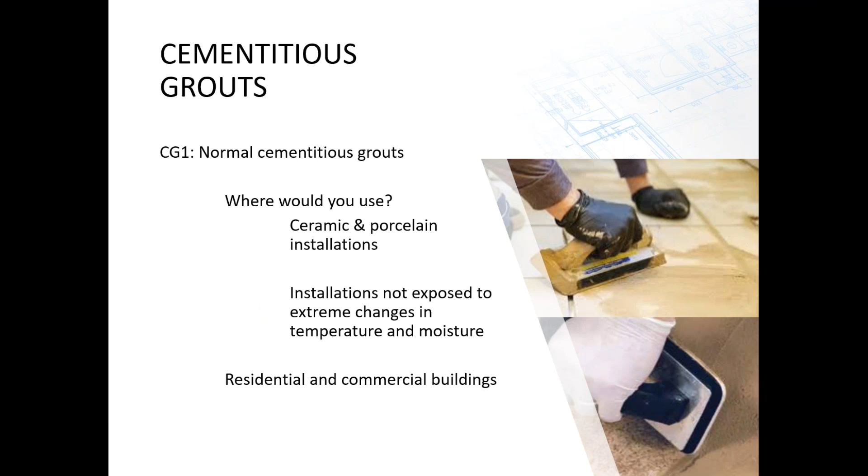Other areas where you might use a CG2, areas where ceramic or porcelain installations, because of the low absorption of the porcelain. Areas subject to a lot of moisture exposure, thermal shock, high traffic areas, interior and exterior commercial and industrial type applications. And again, those designations are fast setting, high abrasion resistance, will take a lot of abuse, high abrasion, and reduced water absorption.

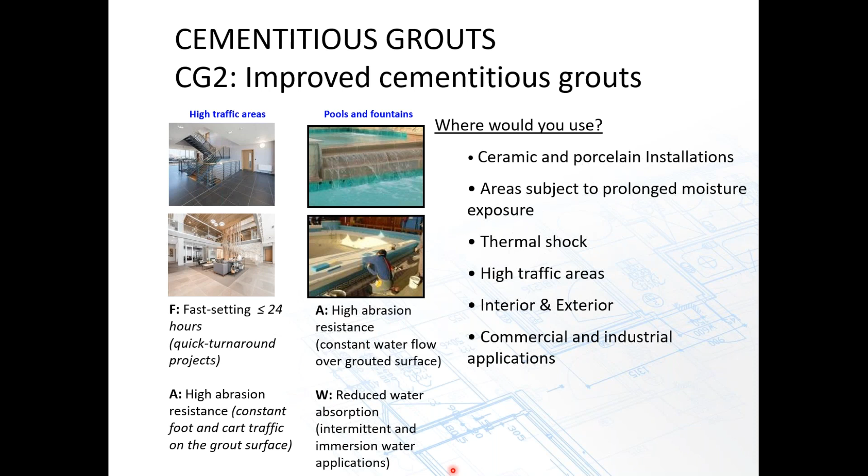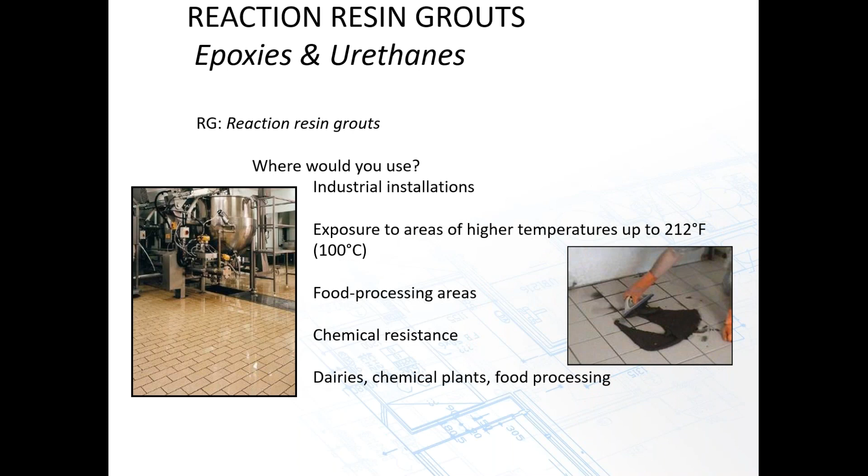Again, other areas, exposure in areas of higher temperatures up to 212 degrees Fahrenheit, food processing areas, chemical resistance, dairies, chemical plants, and food processing. Great examples of use of epoxies.

So standards, why are they important? Well, they establish a quality level for established products that we know have been successful in the United States. Generally, it takes use of these products for a while before we can really write a standard on them.

And uncoupling being a great example, gauge porcelain tile also took a lot of experience and use in installations. To build the confidence in a new tile or product category, like gauge porcelain tile, to establish a standard that the specifiers can use, that's performance-based as a reference standard, as opposed to, again, using proprietary standards.

To the architect, it's beneficial because they know they're getting the material specific for the type of project they're trying to achieve.

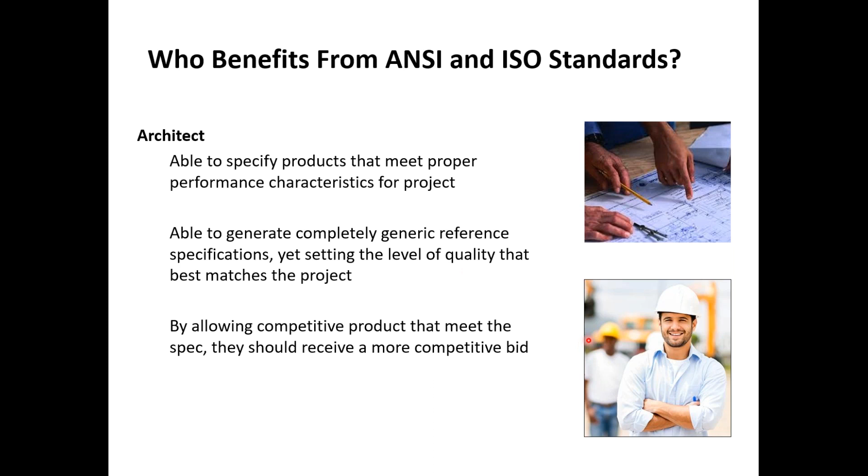They're able to generate generic reference standards and yet set a level of quality. 118.4 mortar versus 118.15. They can call it a 118.15 on an exterior installation, make sure they're getting the right type of mortar. This allows for a competitive product at bid for the contractor, and they should get a more competitive bid.

To the tile contractor, it really makes evening the field a lot easier, understanding what the different mortars between different manufacturers do. You can easily compare the differences in manufacturers' products for performance, can really get a product tailored for the installation, and really offer more confidence in the installation, allowing for a better warranty.

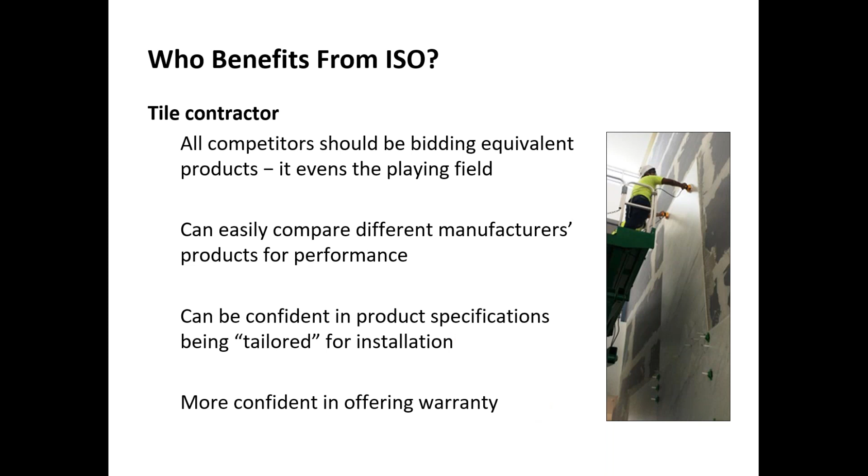In summary, tile industry standards help us establish an even playing field for all involved. Selecting the proper mortar for your project using ISO or ANSI designations can really dial in the performance of your mortar for your specific need.

Specify the grout based on performance as well. As our industry continues to be innovative, we must keep up with industry standards to make it understandable by you guys and make sure you're getting the proper products in the field.